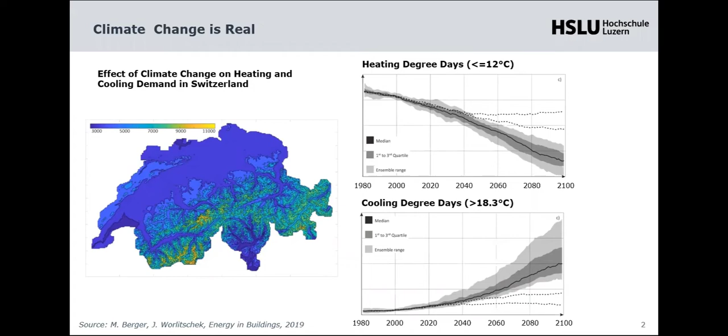Of course, to round out the story here, this is only when we think of energy demand — this is only the very first part of the story. This is really what we need just from the climate perspective, and of course this can change. But then there is a whole series of considerations which lead to the real energy that we consume at the end. It's about the choice of quality and quantity — will we really want to fulfill the cooling demand, which we don't fulfill at the moment, but if it's increasing, will we fully use that? Then, how is population changing, and all these thoughts? And at the end, which technologies do we choose? That's mainly now part of our DeCarbCH work — what whole scenarios we have, and what technologies we use to decrease the energy demand at the very end.

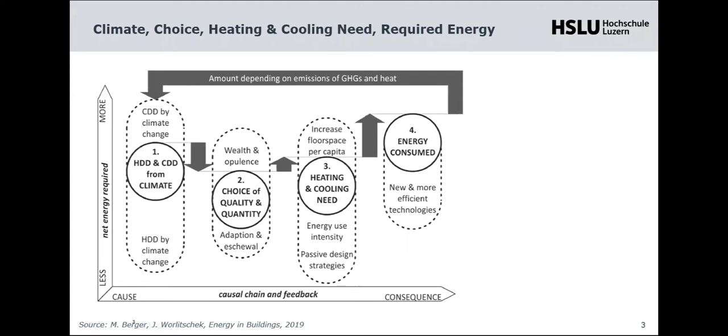So as Martin already said, we are the Competence Center Thermal Energy Storage at HSLU, and I'm happy to present just one word about our Competence Center. We care about assessment of storages — techno-economic assessments — then energy data and models, and thermal energy system models and data science combined. We care about different heat and cold storages, with a focus on long-term storage. And as an add-on, due to our competences, we care as well about processes and products which really need high precision in temperature stability.

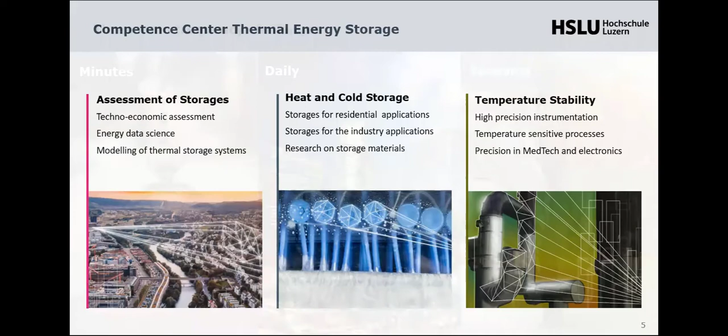At the moment we are putting together a group of people over a few institutions. We are trying to put together some arguments or evidence of long-term thermal energy storage. Just to show a few numbers in this context, first of all, if we look at the energy perspective...

The estimated electricity lack in 2050 is around 9 terawatt hours, and the estimated electricity demand for bigger heat pumps in 2050 is around 9 terawatt hours as well. So just to show a bit the size ranges here.

Thanks to Gianfranco, a few numbers from latest simulations out of the energy system models. If one looks at a CO2 neutral scenario, one ends up with possible scenarios of bigger heat pumps in thermal grids with a thermal energy demand of 6 to 8 terawatt hours per year, and possibilities for long-term thermal energy storages in these grids around 2 to 3 terawatt hours.

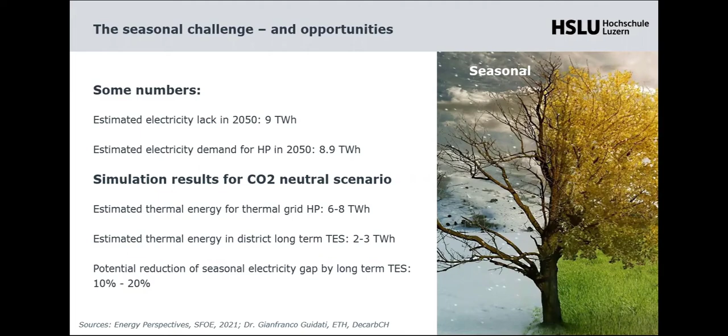Of course, looking at thermal energy storages, I personally think that the potentials are even higher, because we maybe have not considered everything in all models and everywhere, but yeah, that's a bit about the range.

In general, when we look at thermal energy storage, and that's true as well for long term, we have three different ways: sensible, latent, and thermochemical. Sensible is heating something up, the ground, water, etc., up and down, and with that storing. Latent is going through a phase change, like ice storages, or other materials which melt and crystallize, or go through other phase changes, from liquid to vapor, for example, and then thermochemical.

And there, on the one hand, absorption and adsorption processes and chemical reactions. So that's the three types.

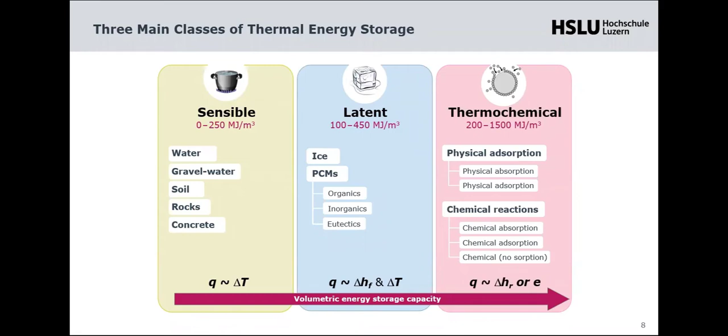Now looking at the possibilities for long term, one must say that of course it's a matter of economics. Sensible, meaning water and ground, of course has a lot of advantages. On the other hand, thermochemical, not that far into development yet, would have the big chance that we have no losses, because we really store in the chemical reaction, and then could go over long term much better. So in my perspective, it is for sure worth going further in thermochemical developments, in thermochemical research.

With different systems, one sees now groups popping up where things are really getting evident. For example, University of Eindhoven in the Netherlands, where there are big achievements in this direction. At the moment, TU Munich is working as well on good systems. And then as well, the work which has been done at EMPA and in Rapperswil on NaOH, all these kinds of things are important to look at in a longer range for sure.

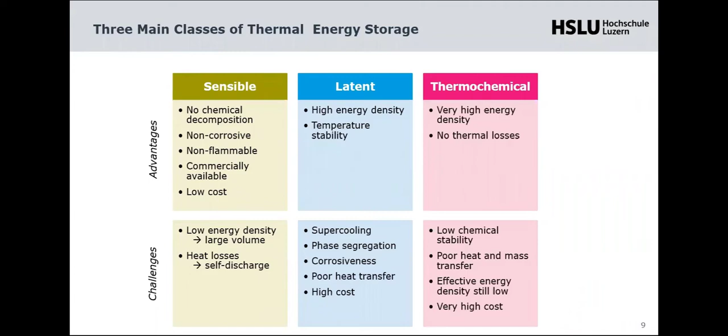And then we have latent storage. There is one of our focus areas as well in our competence center. So these might be combinations, bringing latent into the whole systems, which might make sure to stabilize temperatures and to increase storage densities.

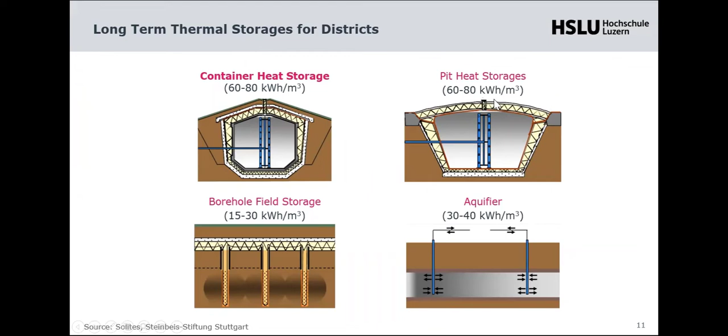So just to give a quick overview of possibilities, for those of you who are not that familiar with them. If we have an overview of long-term thermal energy storage, I'm focusing more on storages for districts, because that's, I think, what we want to look at more in DeCarbCH, because that's where we have the bigger challenge. So if we look at different possibilities, we have more or less four types: container heat storages with water, pit heat storages with water, then borehole fields and aquifers.

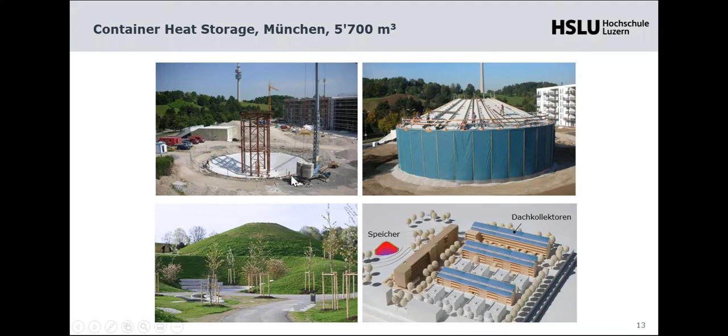Showing here some examples. On container heat storage, for example, a smaller grid in Munich, where you see at the end, it looks like that. In Swiss German, one would say an Überbauung size of grid around. One could see these kinds of solutions, where one could really think that this goes in a direction where, from a social and political point of view in Switzerland, one could have chances for similar solutions.

As well, something which is under development in the Netherlands, there is a company called ecovat. They propose a system which is really underground. This as well could be in a Swiss context, could be a way forward, and where one could look to work together with them.

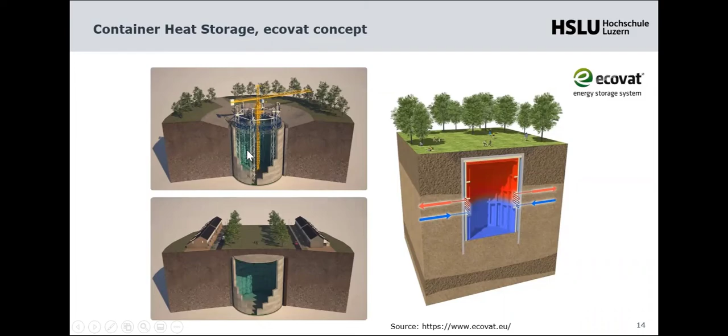So they developed a special way to build these kinds of storages - pit heat storages. Well, when talking about these topics, one always looks at Denmark, because Denmark is really far ahead when one looks at these systems.

Here is one example which is very often shown. It's from Vojens in Denmark, 200,000 cubic meters. Here it's still under construction, but this is running now already for many years, so this is covered here. The technology is a lot about the cover, which is on top as well at the end.

And here, we always tend to say, well, this is not possible for Switzerland, and this will never make its way. I think we shouldn't make it too easy for us. I think we should look at under which circumstances it could make sense, and what would be the political and social measures to really drive these things, instead of just saying that's difficult for Switzerland because of land use, etc. But maybe we find ways to drive that.

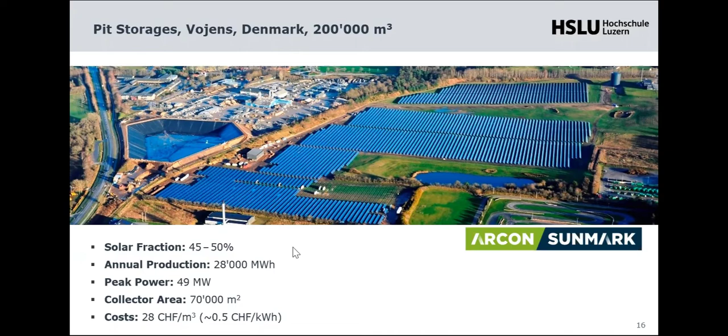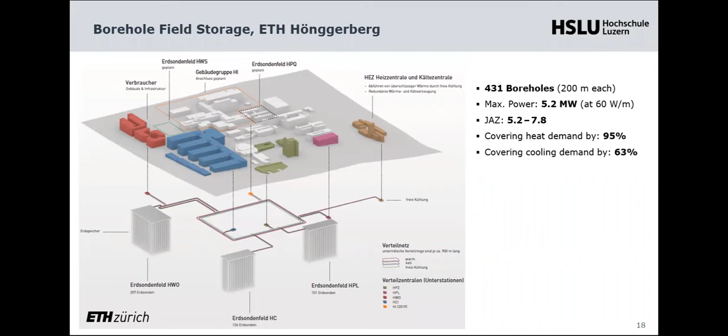If we look at borehole storage, well, here we have examples in Switzerland, like, for example, ETH Hönggerberg, which is well known, where we have such a system installed, and there are a couple of other systems installed all over Switzerland. And then, well, we have aquifer systems which use the ground.

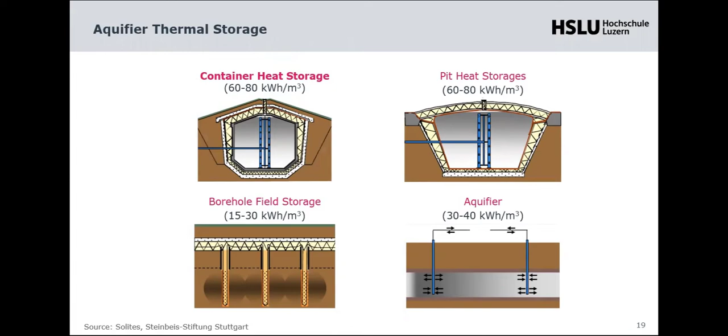So geothermal possibilities. A well-known example is, for example, in Germany under the Berlin Reichstag, where there are different layers which are used. In Switzerland, well, it's a bit a matter of definition, how we define it.

There are aquifers, there's a lot of activity looking into things in the Geneva area about possibilities. There is as well the planned borehole geothermal storage, which goes into that direction.

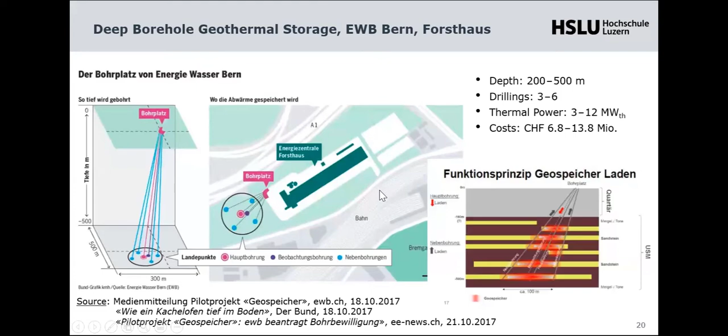It's planned in Bern, at the Forsthaus in Bern, where we will work together as well within DeCarbCH, and here we have deeper drillings down to 500 meters, and then we use the different layers to store the thermal energy.

For buildings, there are different possibilities. We know the Jenni tank, but there are as well highly newer vacuum type insulations which allow bringing it into the ground. There are possibilities of insulating enclosures, and possibilities as well for ground heat exchangers, and of course as well on the thermochemical side, as I mentioned before.

On ice storage, this is something one can think of for districts and for buildings. There are systems as well for bigger districts. If you look at cooling and heating demand on both sides, and looking longer ahead into more equaling out of heating and cooling demand, then ice storages might become interesting in the future.

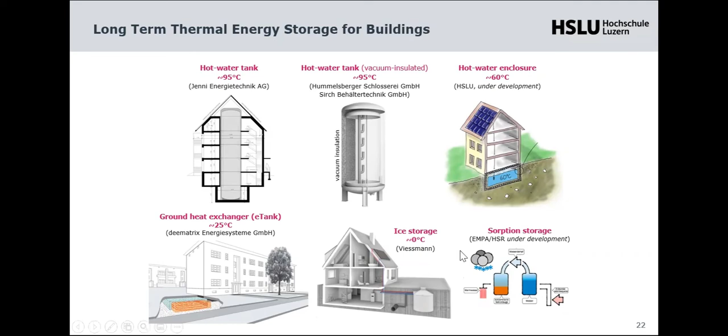Something about economic aspects. If we look at long-term storage, one challenge is for sure that we don't use the storage as normally one would say, charge and discharge as much as possible. We have less cycles. If we go to the extreme, we have a bit above 1 if we are really seasonal, but maybe we should go for more the 80-20, then we might be in a region of a few cycles per year. And still the price is really something very important.

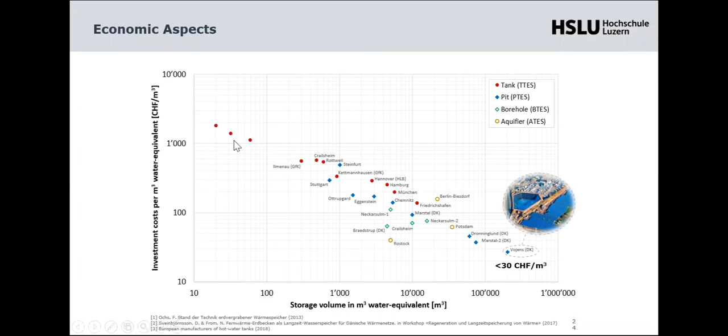And if we go to buildings, well, then we see that the prices are really higher. So there we should really think of bringing these numbers down as well.

If we look at our research questions that we have set ourselves for long-term thermal energy storage, it's really thinking about how can we reduce the cost, and then as well how can we reduce the visual effects, the impacts. So here it's shown for a building, but I think it's even more true if we think of districts and more. And then having possibilities for storing in the ground.

So how can we do other boreholes? For example, we have one project about different drilling possibilities today, where one does not have to drill all straight down, but one could drill as well under already covered areas and under buildings.

Then it's the whole story about covering the models and making sure these models make their way into the system models, into the energy system models for the different scenarios. Today one can still see, thanks to Gianfranco, you're almost an exception out of the different models, as in the all over national views we still are lacking that. Martin, we will see what's coming out of our SNF project, about to finish, which shows more on a national level what the effects are. But in general, we have to make sure these possibilities make their way more into future energy perspectives.

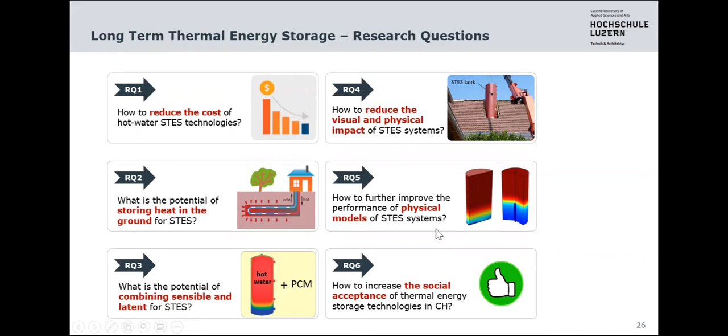Maybe only showing a few things which are important. At the end, small or big storages does not make a difference. Control and stratification is something very important. Seeing results from our models and optimizations, one can see that one has lever arms of up to 40% reduction of storage volume when one goes through other control mechanisms, which then take care a lot about the stratification in thermal storages. So that's not to be underestimated.

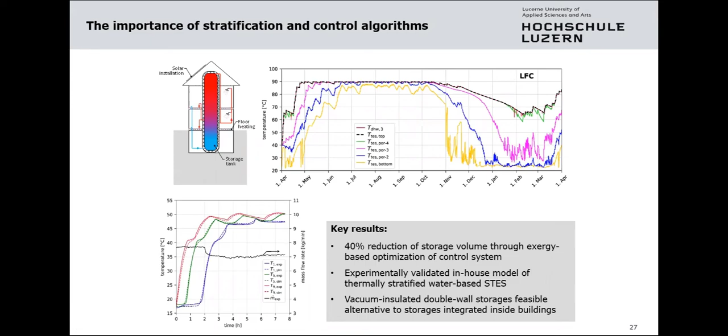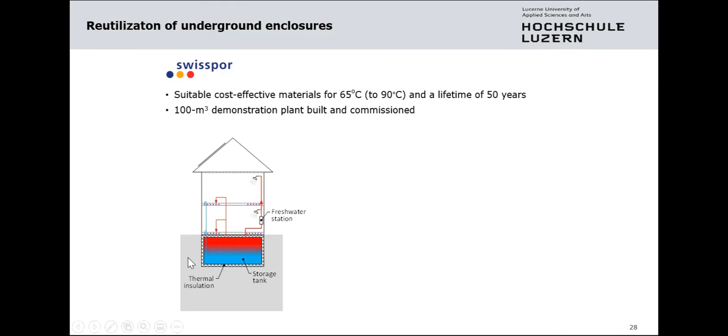On the other hand, what we see as possibilities is that we have a lot of enclosures in Switzerland, naming bunkers and other possibilities. So if we want to drive down the costs, we could think of going into these directions as well. Together with Swisspor, we have developed and are still developing possibilities for enabling underground storages, which come out of enclosures by means of new insulation materials. There is a pilot plant already working and ongoing.

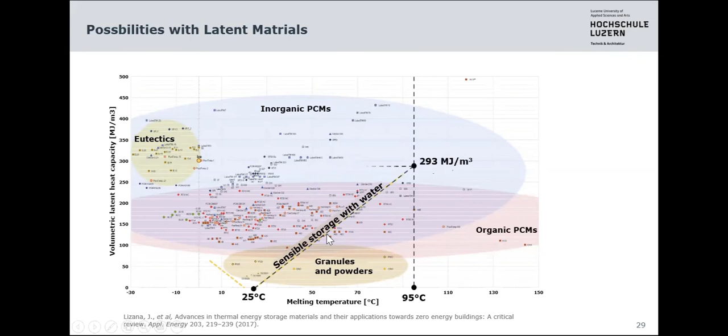So here we really see the chance of bringing in at least partially latent components to reduce the size. One sees, if we go over a big range, we are at a certain level where phase change materials make sense. If delta T's reduce, then there is already much more potential for bringing in melting and crystallization aspects into the storage.

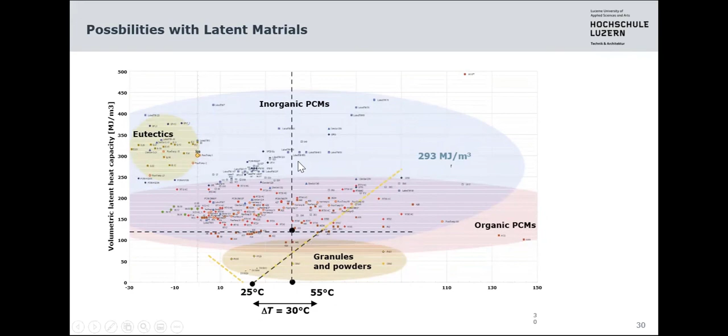So this could be done by combining sensible and latent, and this could have two effects: on the one hand, increasing the storage density, but on the other hand, being able to go into other shapes where stratification could be ensured by bringing in latent components which ensure certain temperature ranges.

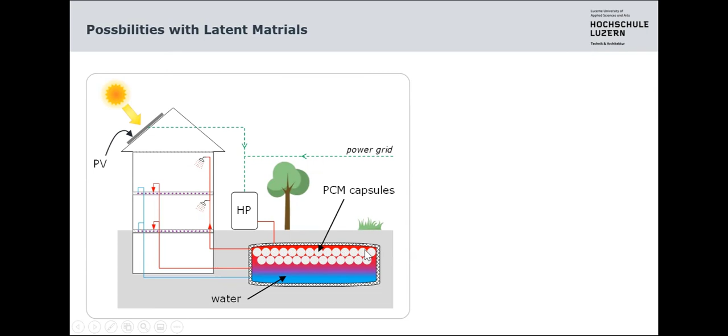This cannot only be thought small, this could be thought in bigger contexts, where in a Swiss context in particular, we could think of using underground enclosures which are around, but using, of course, combinations with boreholes and other technologies, and then bringing in these kinds of stratification insurances, I could call it, using latent materials.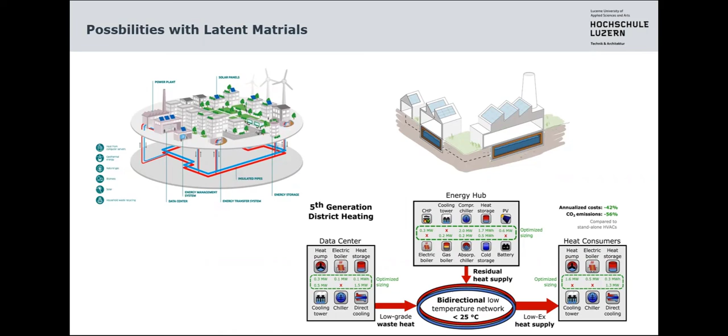Yes, that was a bit of a view on different possibilities and different views into long-term thermal energy storage. From my point of view, the big opportunities are that we bring them into the models and into detailed views, that we look further for more compact possibilities which could fit for Switzerland, and work very closely together with social and political scientists to drive this and understand where the lever arms are. Thank you very much, and yes, that was it.